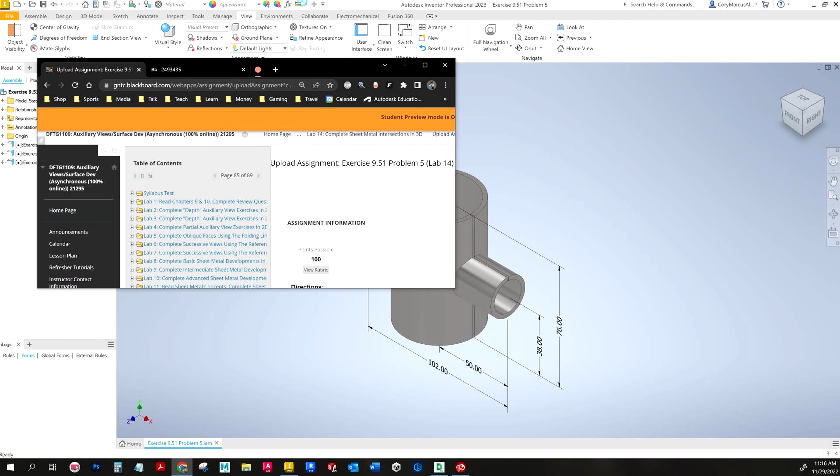So I'm going to move this off, and here's what we're working with. For your sake, you have this DWF that you can use as your dimensions, or you can just reference the volume on it to see if you're right, whatever you're wanting to use it for, but you do have a visual reference.

And I'll go ahead and show how I went about modeling this myself, and then we'll get into it. Basically we have to have 3 parts because the 2 side pieces are not exactly the same size.

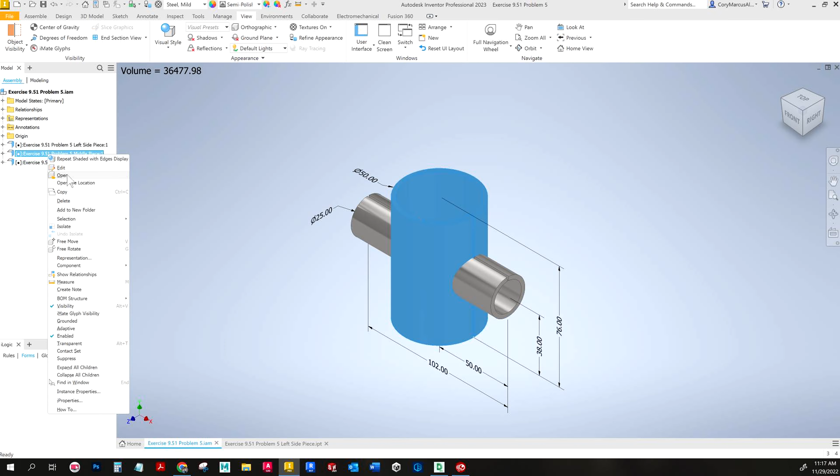So let me go ahead and open them up. I didn't do anything crazy. The parts themselves are very easy.

All we're doing is a base sketch, a second sketch offset from that, basically just projecting that same sketch, doing a lofted flange with the die form option, making sure that it's flipped within the profile drawn, then a rip, and then our cut. And the cut is naturally going to be the profile of the other part. Pretty straightforward, and then unfold it.

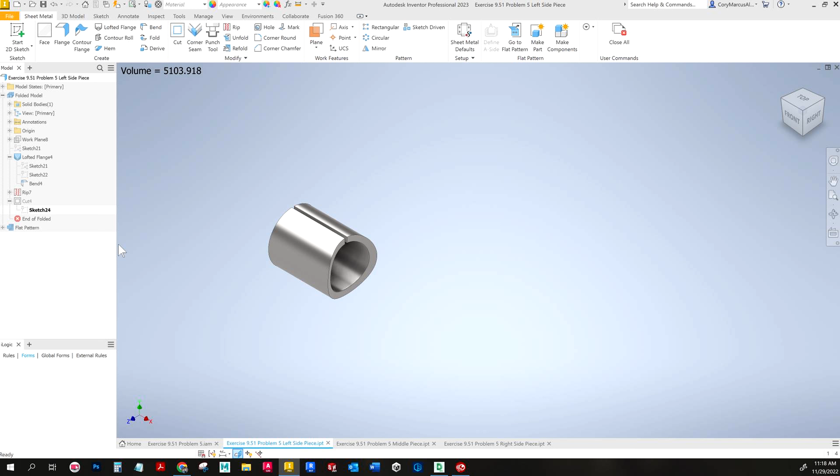It's the same concept for the side piece on the other side. The only difference is our offset value is a little different because we have one of 50 and one of 52.

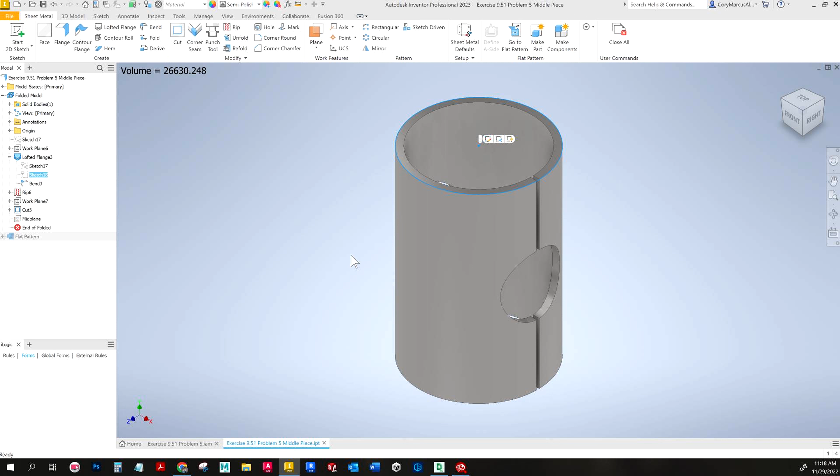And then the middle is essentially the opposite. So we have our round sketch down at the bottom. Then we do the offset plane, and we have a sketch on the top projecting that bottom sketch, rip again, and then a cut of that side profile. So this one will actually be easier than the last one.

And then when you're done, you can constrain it together. And one thing I do want to point out.

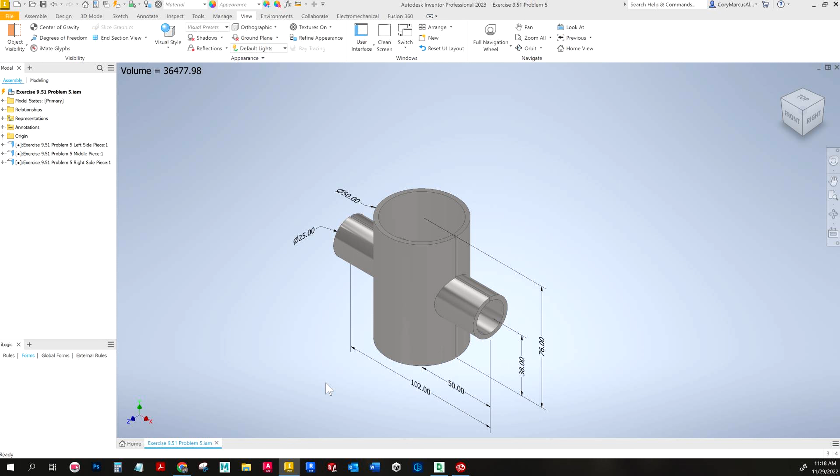So I talked a little about it in my last video, but I didn't really elaborate on what cut normal is all about. So let's just talk about it.

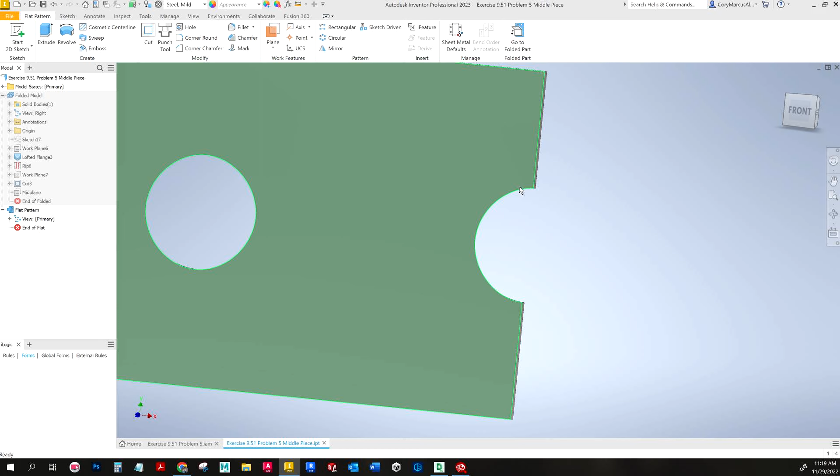If we were to open this guy and look at the flat pattern of the holes, you can see that on the back side, it's kind of warped. So if they were to cut this out on a burn table, it can't do that — it can't have this angled cut. It's hard to really tell depending on where you're looking, but it is angled. That's why when I'm looking here at the back view, you can see it's got this double circle. And that's just not how it can actually be created using a burn table.

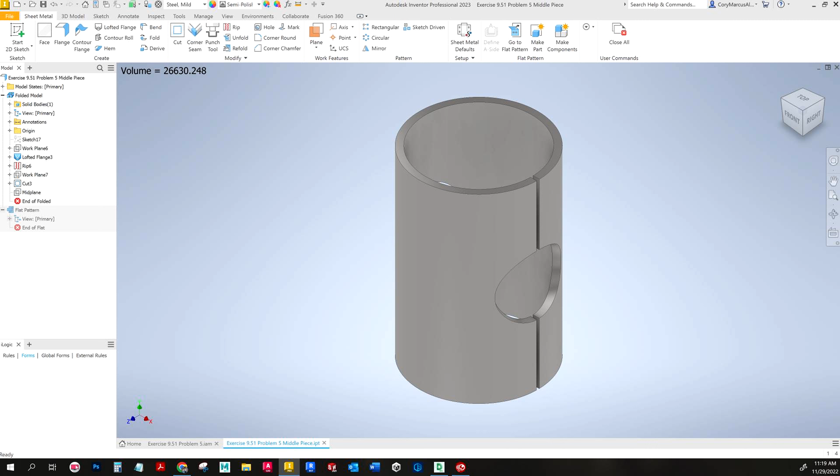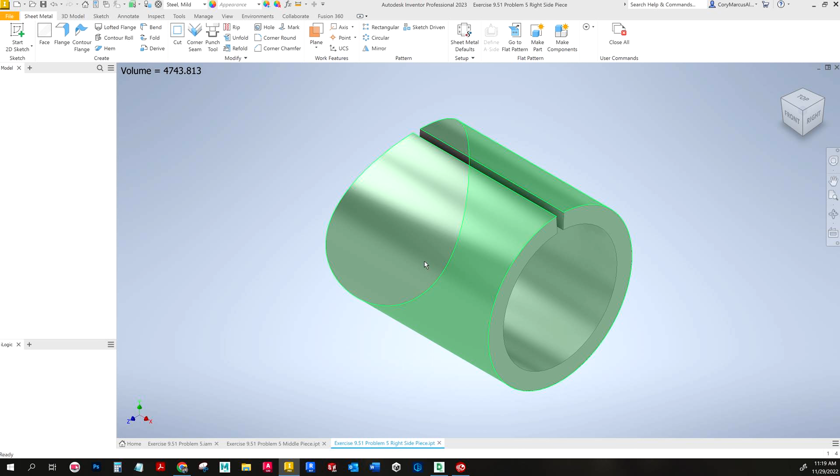So the purpose of cut normal is that when you hit the checkbox for it and go unfold it, it looks like this. There's a little bit of an edge it looks like, but it's basically none — it can cut straight through. This is a true how-it-would-look shape. And that's the premise of cut normal: to create it how the shop actually would have it come out of the table. The pitfall of that for what we're doing is it leaves this little gap.

And for them, what they would probably do is make this run long, make this hole bigger, cram it in, and just kind of make it work because you have this big old gap.

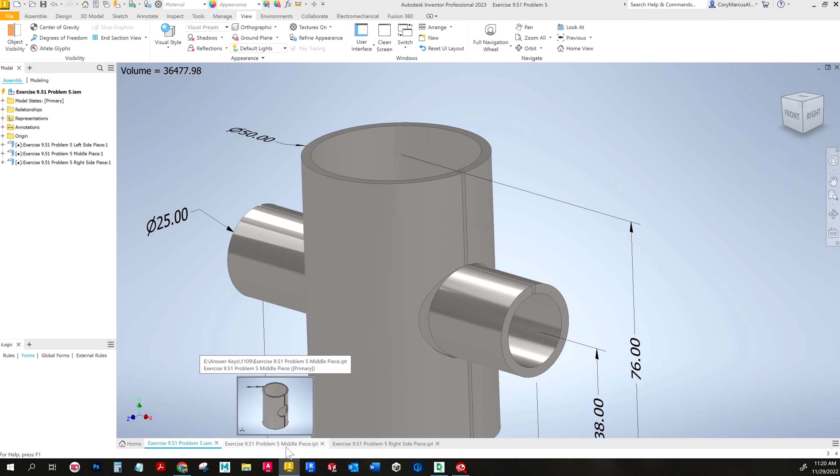They would just cope with it, they'd make it fit better, but for what we're doing, that's a little extra. So we're not going to use cut normal, because obviously it's not going to be aesthetically pleasing. Just keep that in mind. That is the difference when I reference cut normal: true to size versus true to fabrication versus a perfect environment where you can do whatever you want.

I already goofed because I opened up an Imperial template. This is on metric.

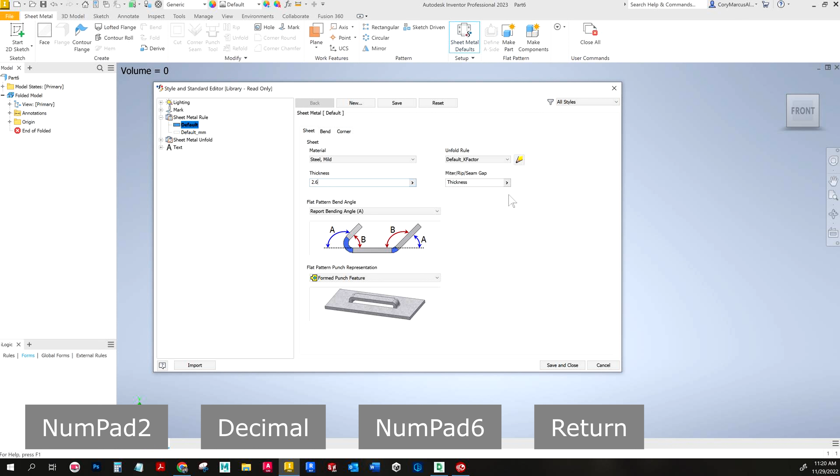And we'll convert it to sheet metal, set up the sheet metal defaults. So we want a material of steel mild. Our thickness is 2.6. Our K factor is already set, and our bend radius equals thickness. So we can just go ahead and hit save.

And let's go ahead and save this part. We'll use this one to be the middle piece. And what I'll go ahead and do is save 2 copies—well, 1 copy, actually, and we'll make this a side piece, the left side. That way I don't have to redo the sheet metal defaults both times.

And we'll start with the middle. Go ahead and get a good look at this. Basically, we're doing a diameter of 50, an overall height of 76. So I'll just move this out of the way.

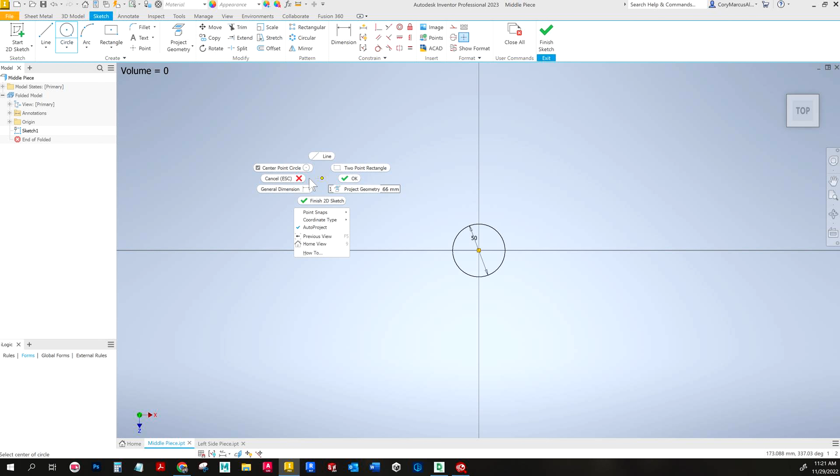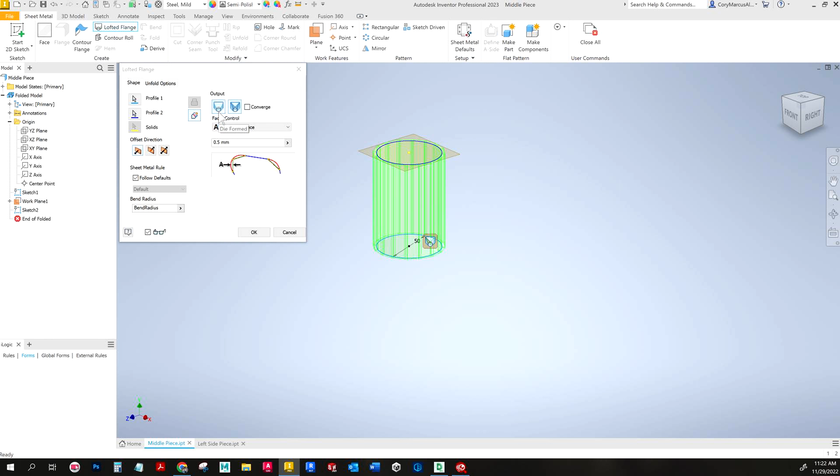So there's one, and we'll do our offset plane from the origin plane that matches, and that is 76. We'll draw a sketch, project the existing circle, do a lofted flange, die formed, and we need to flip the direction to make it hit the extents of the sketch.

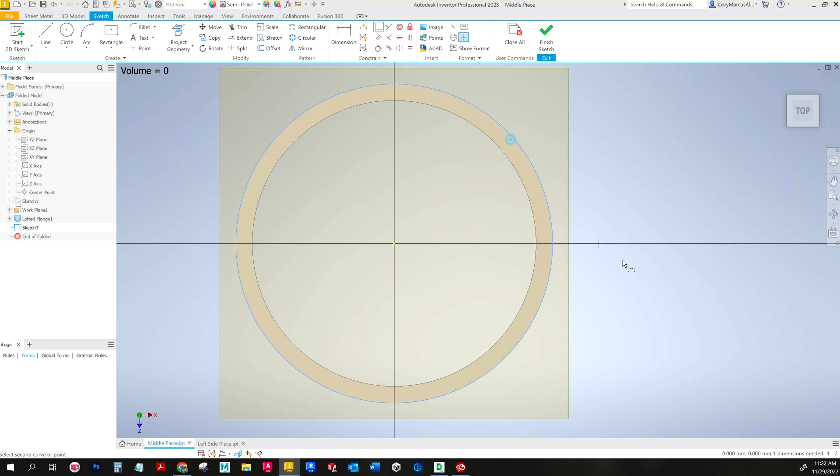We'll go ahead and do our rip. Now I'm going to do it on the rightmost quadrant, so I'll project the existing circle. We'll do a horizontal to locate it, and then a coincident from the projected edge to the point. Go ahead and do the rip.

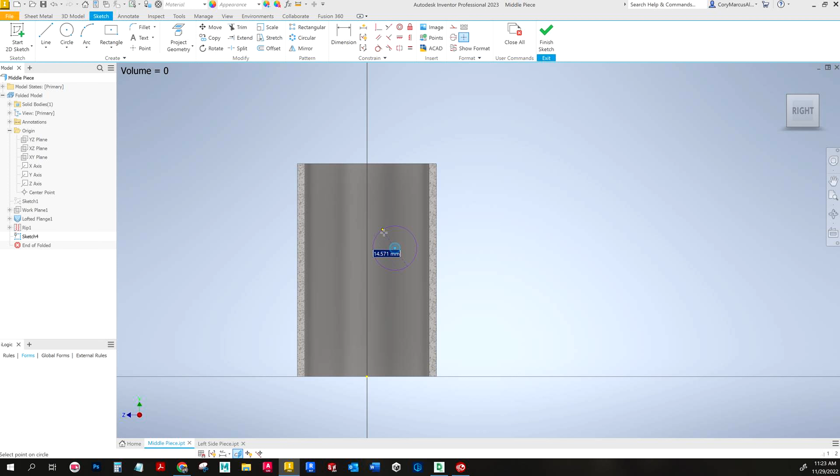We'll turn off that ugly little plane. Okay, so now we just need to do that little side cut. So I'm going to do a slice graphics. And that circle is 25. Now, judging here, it's 38 from the end to here.

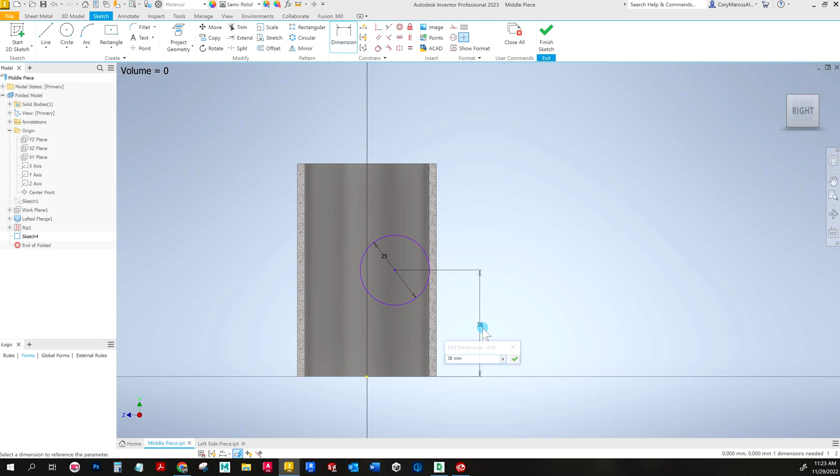Naturally, that is the midpoint, so you could just project some stuff and make it the middle. But what I like to do in a case like this is, if it gives you that value, it may change. So I'm going to do the dimension, because later on, say something changes, I could make it 24 and I wouldn't have to break any constraints. So we'll put that dimension, and then I'm going to align these 2 points.

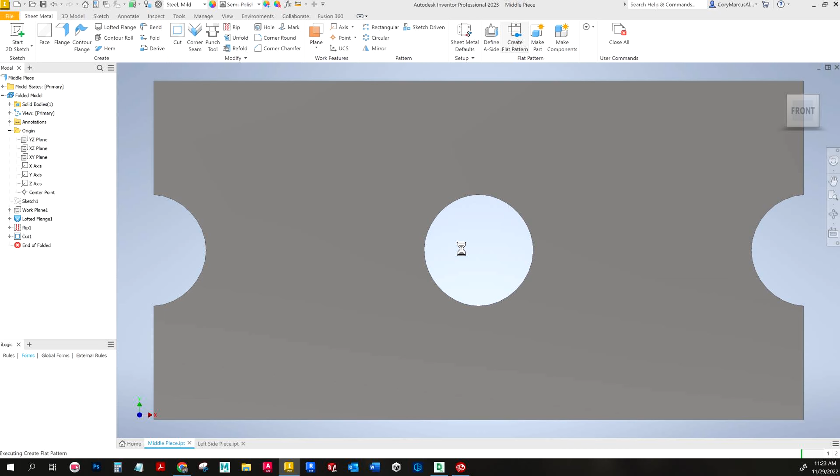And we can do a cut both ways and through all. And just like that, we can make our flat pattern. We've completed that part.

I feel like this one's a lot easier than the past assignment, to be honest, but you do have to make that extra part, which kind of sucks.

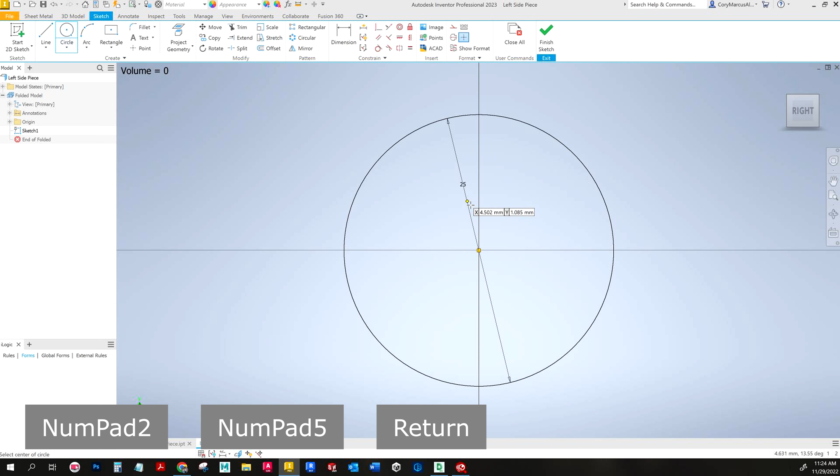All right, so we'll start with drawing that same profile again, and it was 25. And then we'll do an offset from plane.

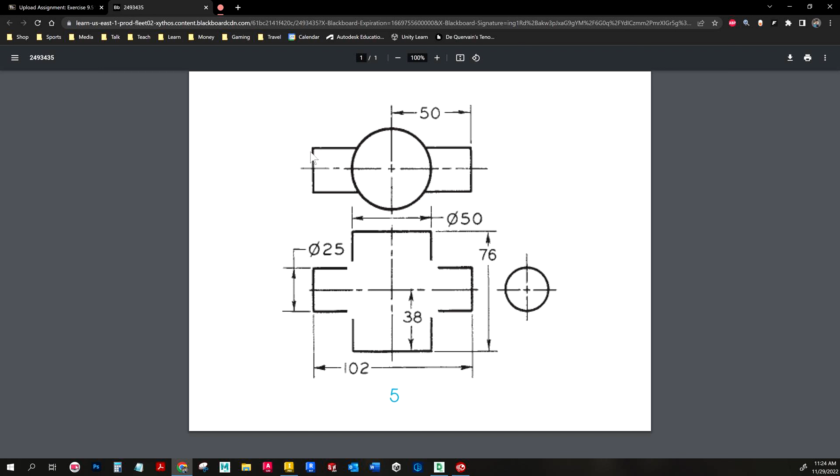I'm going to do minus because we're going to do the left piece first. So it's 50 to the right piece, so this one's going to be minus 52, because 102 minus 50. Basically I'm saying from here to here, that value.

And we will do another sketch with projection. You probably thought, when you started looking at these, that these would be much harder than they actually are. But if you go about it using lofted flanges, a lot of times it's a pretty basic process, really.

And we'll just do the same thing, die form facing inward. So we've got the extent, and we can go ahead and rip it. Now for this one—oops, forgot my sketch—for this one, I'm going to draw the point down here on the bottom.

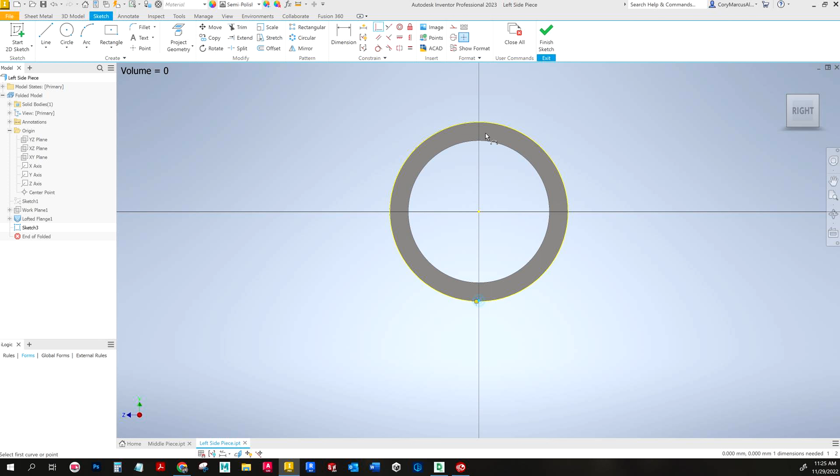A lot of times when you work at places, they want the seam to be kind of hidden. So when you're in assembly, if you can have that seam on the bottom so it's not just protruding out, that's usually ideal. So we'll do that, and then I'll do a coincident and align these 2 points, and we'll rip it.

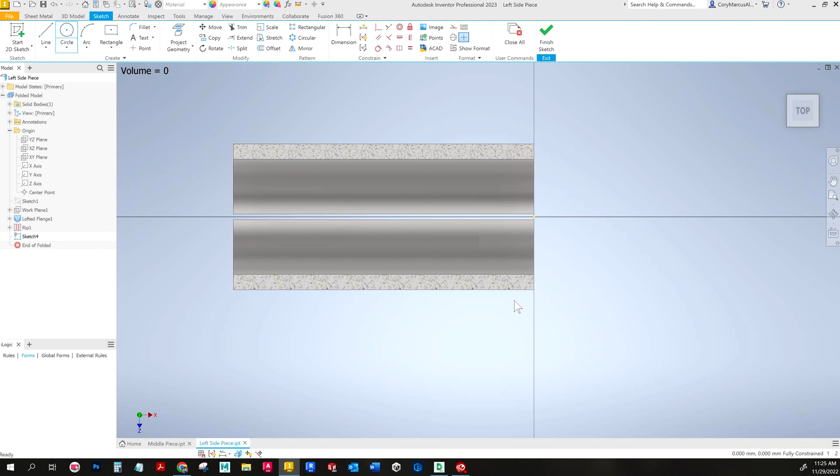Okay, so now we just need to go and cut out the rest. So I'll rotate my view since it likes to always do that. I'll slice my graphics, and I'll draw on the origin point. The size for this is 50.

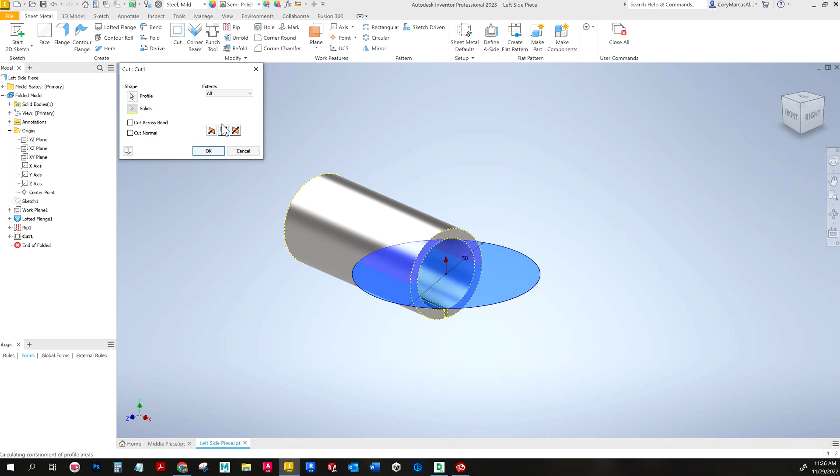Then we can actually just go ahead and cut through both ways. Fun fact, sometimes if you do it too quick, it won't catch that little click there. Okay, so when I look at this on the top view, you can see it's got that contour now.

What we can do is go ahead and save it, and save a copy of it. Name this one right side piece. And I'll open that right side one we just saved a copy of.

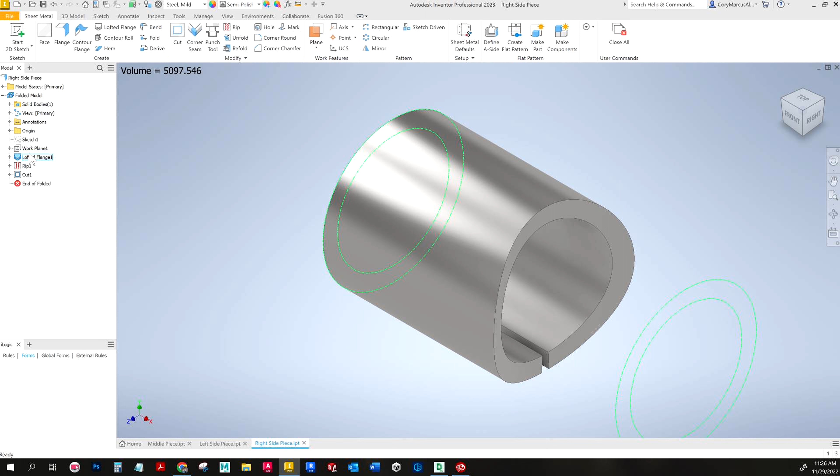Now, in an ideal world, this would just work, but I'm pretty sure when we flip it, from the origin here to going 50 over here, as the book shows, it's going to break a few things. We'll have to redo it, but it's still best to do it this way, just to save a little bit of work where you can.

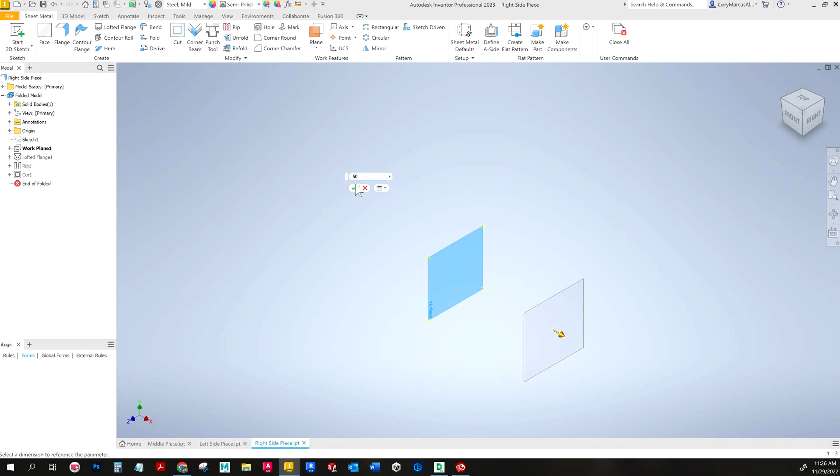So I've flipped it to 50 this way. And I suspect, yep. So when you look, even though it maintained the loft, it does need to be now flipped because it's mirrored. So make sure you've got that extent as your direction. Other than that, I think we're good. You know, look at my sketch here to be sure, but yeah.

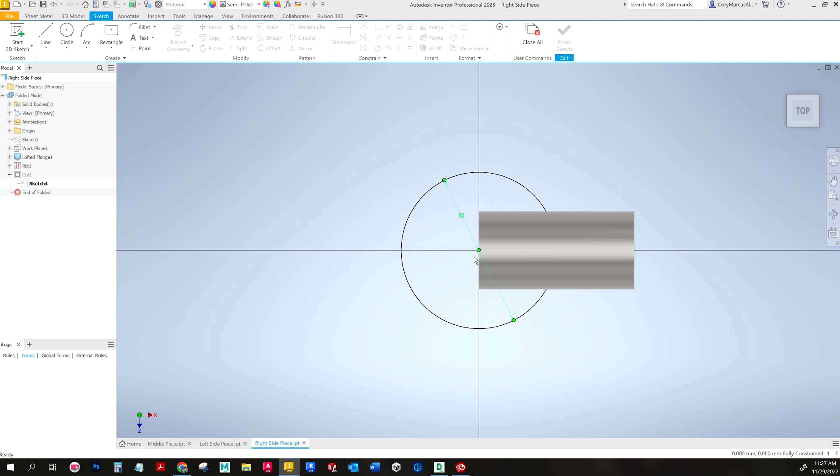Okay, good stuff. So we can actually go ahead and put it in an assembly. I'll grab those 3 pieces. We'll just place them arbitrarily in the view. And we'll constrain this guy to the assembly origin.

But first I'm going to put on shaded with edges for the visual style so I can see a little better.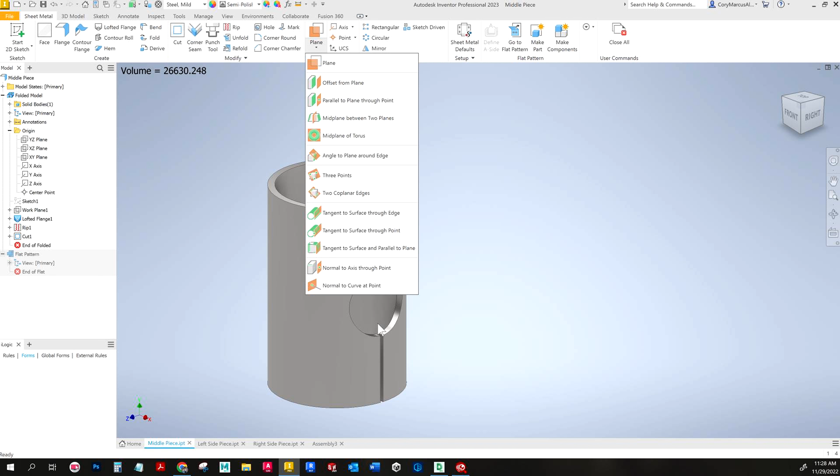And one thing I would like to do actually, so we have the bottom plane and the top plane. But what I always like to have for a piece where you're constraining to that center there is an actual plane for it. It makes it a lot easier. So we're just going to do a mid plane between these 2 planes. Okay, that should make this next step a little easier.

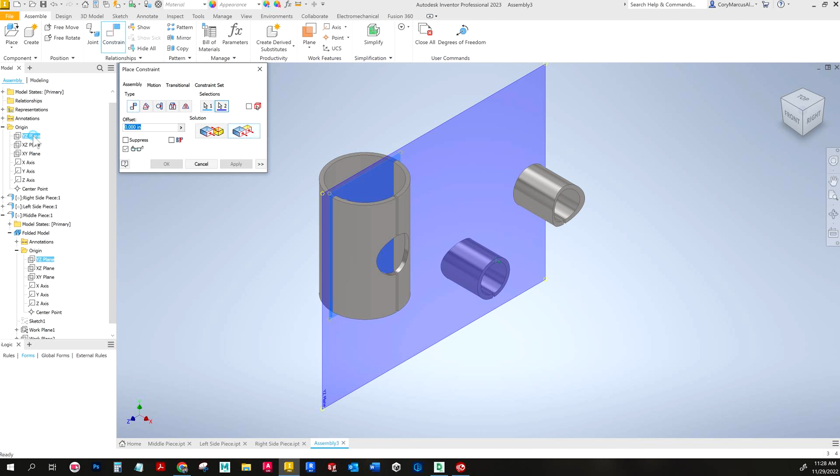All right, so we're going to go through and do YZ to YZ, they'll be flush. XZ to XZ, flush. XY to XY, flush. And then it doesn't move.

Okay, so I'm going to position these guys in a place so don't get confused. We'll do the left side to the middle piece first. I did not mean to collapse the middle piece, so I meant to collapse the assembly origin.

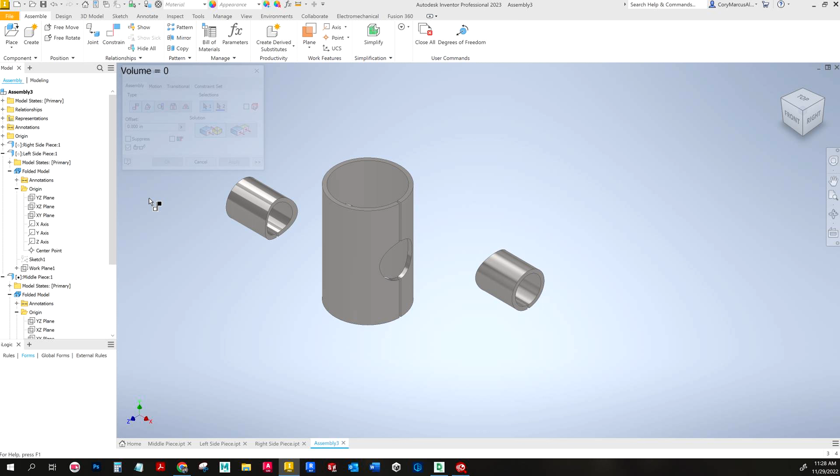All right, so let's do YZ to YZ, XZ to that new midplane we made. And notice I'm just doing flush on all of these. If you draw them in the correct position, you usually can just do the same names and not have to look too much. So keep that in mind. And then XY to XY. And that one's done.

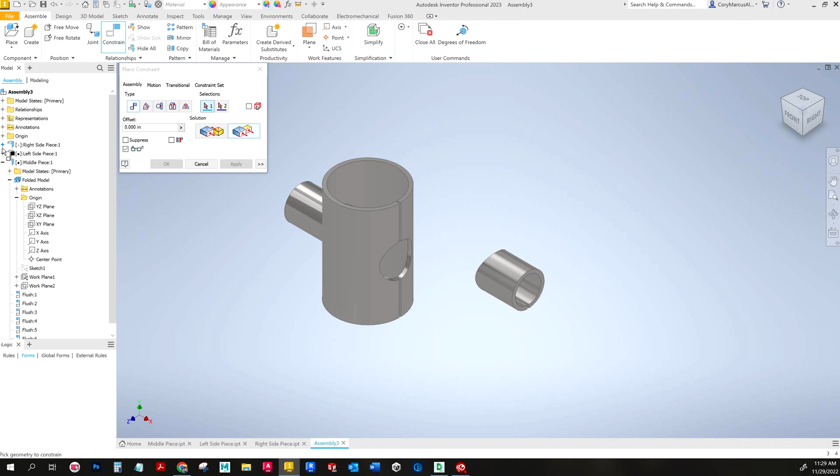So now we'll do the same thing with the right side. YZ to YZ. XZ to XZ. Oops, not XZ, I take that back, the midplane. And XY to XY. Okay, lovely.

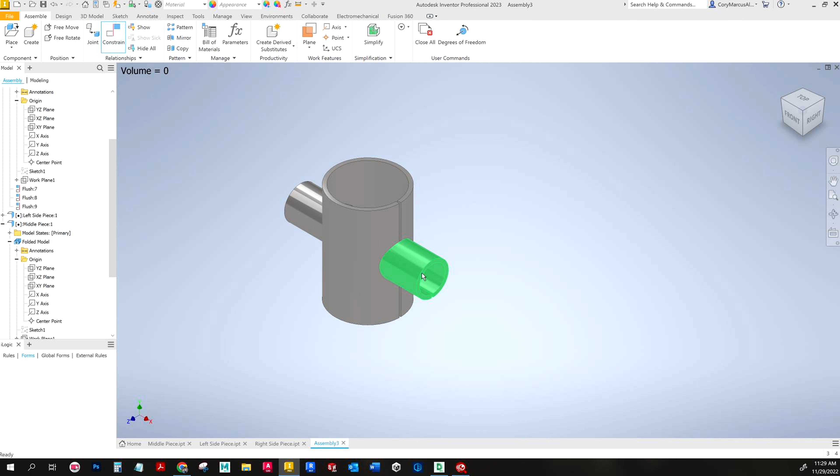I turn on my degrees of freedom. Nothing moves. And we've got an assembly.

Now, to check yourself, one, you could save it. I'm not going to bother with the name, you get the idea. I'm actually not saving this for actually keeping, I've already got it modeled. So, but to check it, you can check your volume.

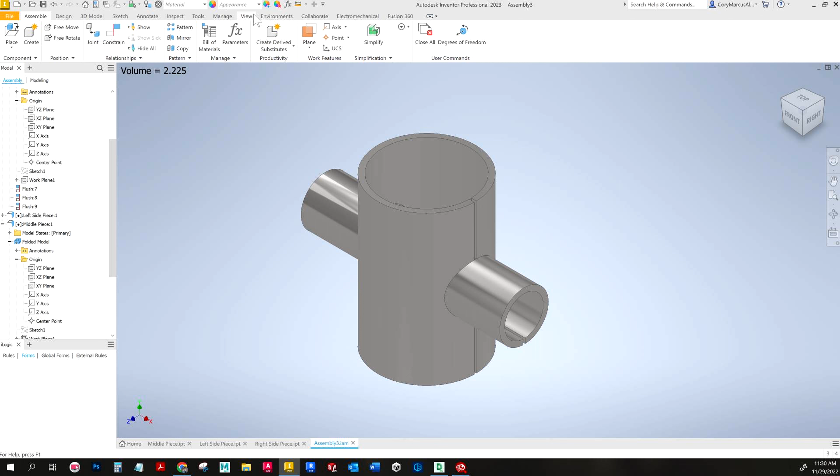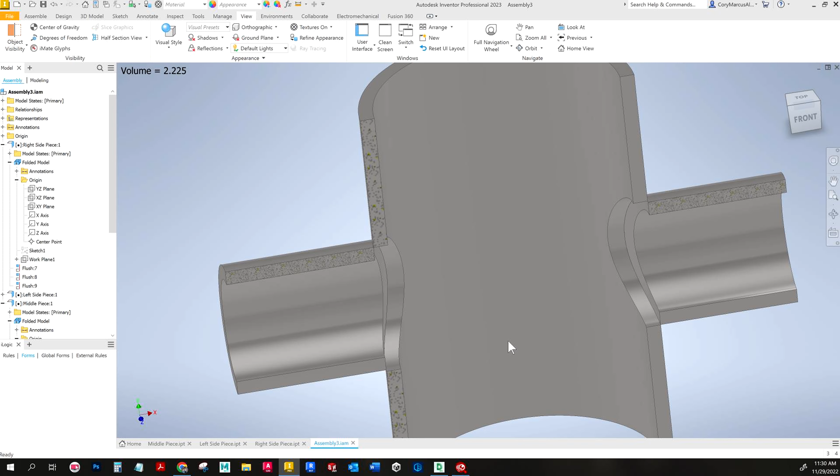And then you can do a half section view. And what we're looking for when we cut it in half is that you have these 2 corners that butt together perfectly. Because this is how they would weld it. They would essentially fill this corner, welding all the way around the inside, and they'd probably do it on the outside. But the general idea is, say you had something made with sheet metal, you can allow flow of whatever through and through seamlessly. So no protrusions, it's just a perfect meeting point.

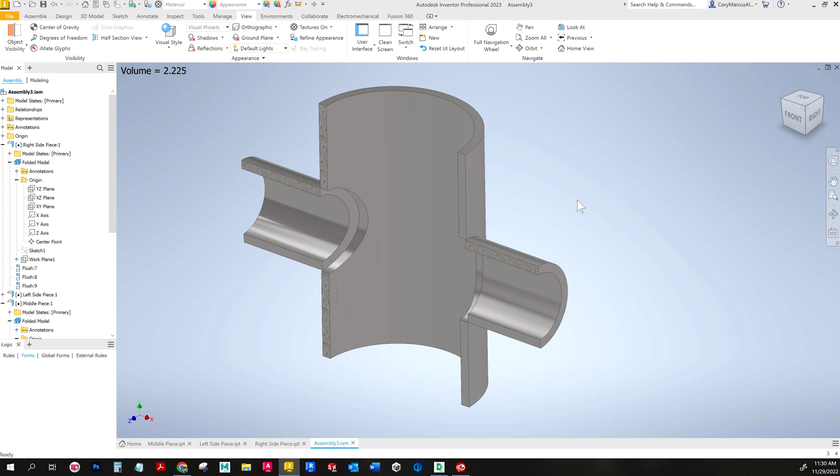And it's surprising how difficult that can be to pull off. So, here you have learned in a relatively quick amount of time. If anybody's having any questions about how to go about this one, just let me know.